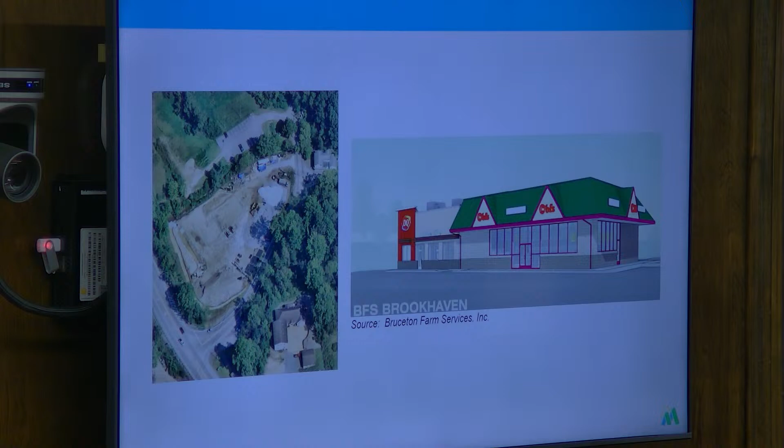One other quick question - if we could go back to page 2, or even the site plan with the districts, on the very southern part of the site it looks like there's a tiny part that might be out of city limits. Yeah, we brought that in - that was outside city limits a couple years ago, it's now all part of city limits.

Okay, I just wanted to make sure you weren't trying to get approval for the pylon sign outside city limits. Yeah, no, we had brought the piece of the property that was outside the city into the city. Oh, I remember seeing that now. I wasn't aware - so that's an old city zoning map that hasn't been updated yet, but that's all been addressed.

Any questions at this point? Thank you, and just to reiterate - you touched on this, but I want to be doubly sure - this is entirely consistent with your marketing and other things. Yeah, literally every store we do looks the same. This will actually have less signage because of the elimination of the box signs. Thank you for your flexibility in terms of the dormers with regard to the BFS signage.

We may have other questions for you, but thank you. Thanks.

So we're going to go ahead and open the public hearing for this case, VAR 24-163. Anyone wishing to speak in support of or in opposition to this case, now is your opportunity to do so. Seeing no one, close the public hearing.

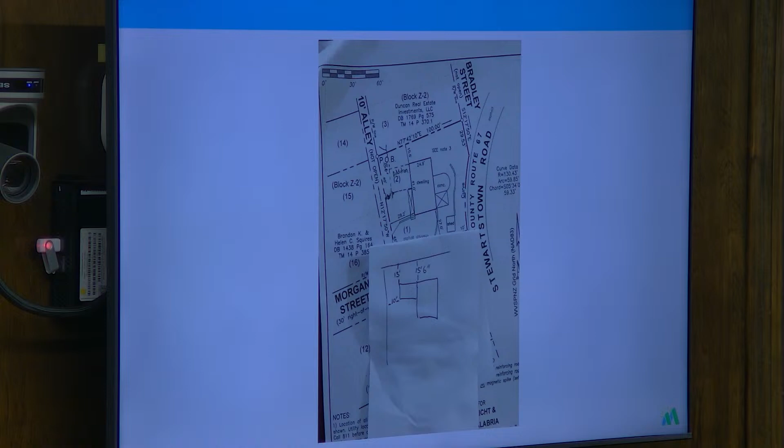That is the site plan that shows their setbacks that they're requesting. On the bottom is just the napkin drawing that indicates the rear setback, or the rear property line, as well as their side property line. You'll notice the top property line distance is referenced as 13, and that'll come up later in the variance that they're requesting. So just keep that in mind visually.

So based on the conditions listed above, the applicant requests the following: variance relief in the amount of 7 feet for the minimum rear setback of the single-family residence. That's in relation to that 13 feet. If you look at section 1335.04 for setbacks, the minimum is 20. So that's that connection there. And that concludes staff report. Thank you.

Do we have a representative for this case? Yes. Please come forward, approach the podium, state your name and address. Benjamin Leach, 845 Stewart Street. All righty. What are you proposing?

Well, due to the positioning of the home and the lot size, we're proposing to add on to our home, to expand, because obviously in the 70s they're small. We're looking to stay in the community and expand this home and improve it, as opposed to leave, which I know probably isn't relevant to code, but that's the biggest reason we're wanting an addition. There's an alleyway, a utility alleyway, between the left side and my other property owners to the left, and to the rear their homes are positioned completely differently, so I don't see where it's going to be a problem with the neighbors unless they come up and say something different. But really, we're just looking to expand upon this home and make a little bit larger livable space.

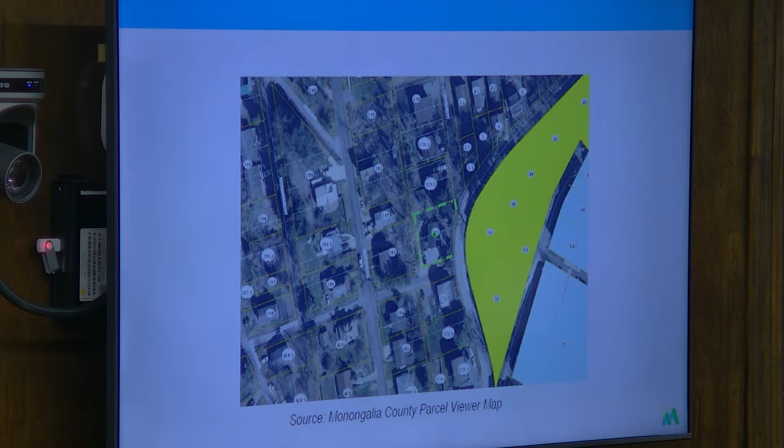Also, in the back, I discovered where the line goes through the property, my neighbor's sewer line from up above comes through that backyard at a certain point and runs down that side yard, which again would be missed by the addition, but it kind of eliminates that area from being dug up for the addition, because we'd have to deal with it—it's just a 4-inch sewer, but yeah.

And this is a big hillside here, but it's really an unusable yard because it's such a slope. So it's not a nice flat yard—it's a very unique lot.

If I'm understanding what you're proposing, on the left, would you call that the front of your house? The garage side here is the entrance from Morgan Street. So if I'm understanding this correctly, you're actually pushing the addition to line up with the back side of the house, not the front? The back side of the home.

There, that's really their utility way where they're coming through and running that new pipeline. We spoke with them, and they said we could be 10 foot of center of their pipe, but I'm proposing 10 foot from the property line back on that side, which is well within the variance for a side setback, but we're still going to stay set back to make sure we're out of their way. I talked to MUB when they were on site, before we signed off paperwork, about the construction easement and the potential addition, and they gave me a letter stating that, as long as I was 10 foot from center of the pipe, it would be fine.

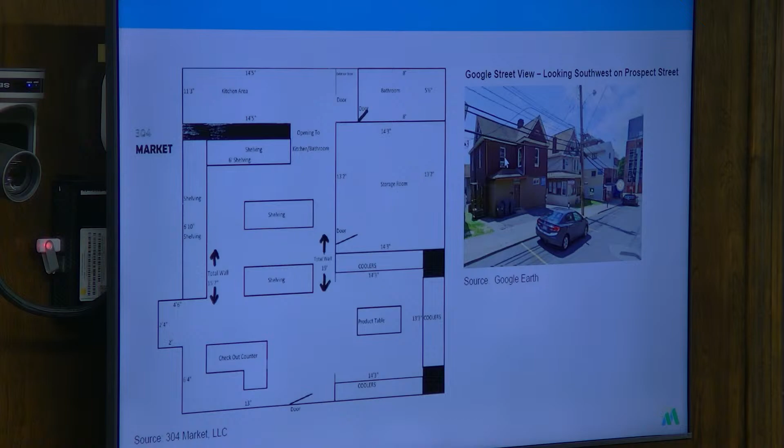Thank you very much. Do we have a representative for this case? Please state your name and your address.

Thank you very much. My name is Jeffrey Bailey, and the address is 228 Prospect Street. We purchased it a few years ago, and ironically, when we did a little history search in the neighborhood, this used to serve as a convenience store back in the 50s, 60s, and 70s, owned by a local minister. It was then converted by the person we purchased the property from into a 2-bedroom apartment downstairs, but you can see where the walls were added and where the convenience store began. My wife and I own that entire block, and we're really working to change it. One of the things we want to do is provide a service to all the WVU students living in that area, including 3 dorms, 7 fraternities, 6 sororities, plus a lot of rental homes.

We are asking for a variance in the parking requirement. We're guessing that well into the 90th percentile will be foot traffic, and that'll be our targeted audience—people walking to and from campus, people coming from the dorms. We just want to provide a small convenience store where they can come and grab snacks, drinks, toilet paper, paper towels, batteries—a needed commodity. Our son lived in this neighborhood that we owned, and he said it's one of the things they needed most, especially the kids in the dorms.

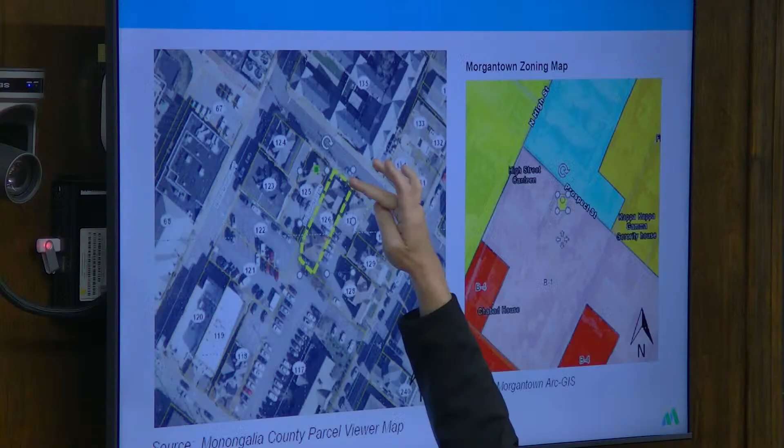We do have enough room, if need be. The door would be on this side of the building, if need be, to be right here and still be off the sidewalk in front of that building too.

So you're requesting 2 spaces? Just instead of the required 4, reducing it to 2 spaces. Because, be honest, we work there all the time, it's our property. I would guess that parking spaces would hardly ever be used, but we know we need to provide them for the patrons. That's why we're asking for the variance of reduction from 4 to 2. Our foot traffic—WVU students and professors—oh my goodness, do they walk by our place all the time.

And in this work on the bottom floor, will there be any changes in the occupancy of the units upstairs? No, it'll be the exact same. Actually, I spoke to Mr. Yeager about that yesterday. He told me it does not affect the parking available for the unit upstairs at all. I believe it's required 2 spaces, but we actually have 3 for the 3 bedrooms upstairs.

So that's an interesting thing. It requires 2, you have 3. So there's plus 1 there. Is it really possible, just for technicality's sake, to switch that 1 spot over to your shop, just on paper? Because then you only need a variance for 1.

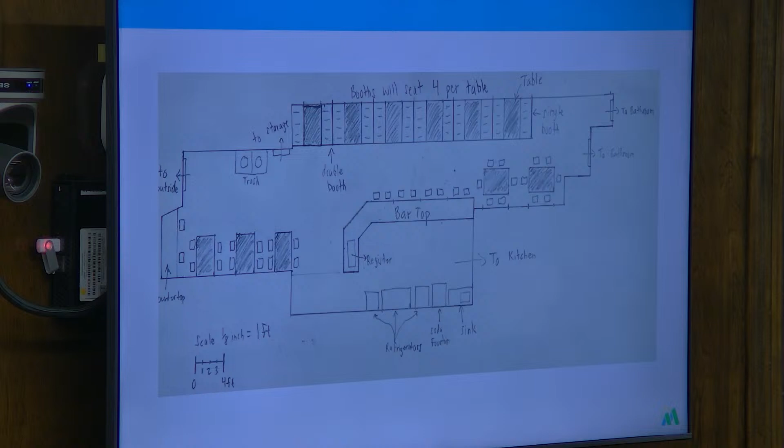That will conclude staff's report. Thank you very much. Do we have a representative for this case?

I'm Christopher Huff from 105 Treville Avenue, Morgantown. I'm here representing Monarca Taqueria. Really, it's just to be able to get the hard liquor stuff, to be able to do margaritas, micheladas, and stuff like that.

We've noticed in the past year since we opened on February 9th, 2023, that towards the end of last year and the beginning of this year, two competitors moved in, El Pollon and 1942 Tacos and Tequila.

Both of those have that hard liquor license, and we've noticed a decent drop off in our sales because of it.

Even a lot of our customers say, you have amazing food, but we would like to see the margaritas, we would like to see the tequila. So honestly, from basically customer request, we are putting forth this application.

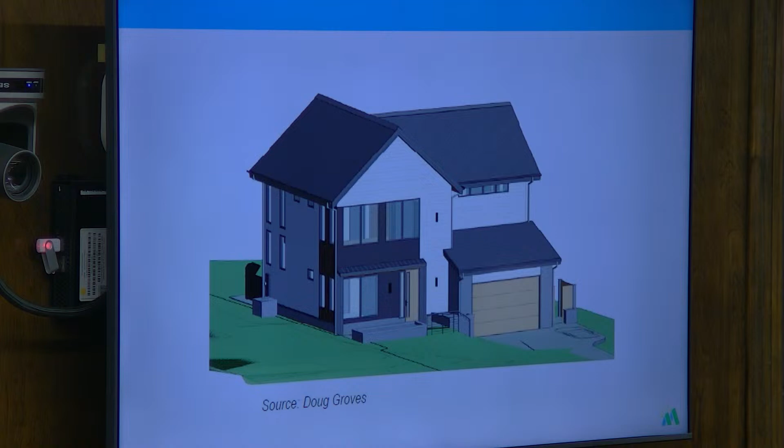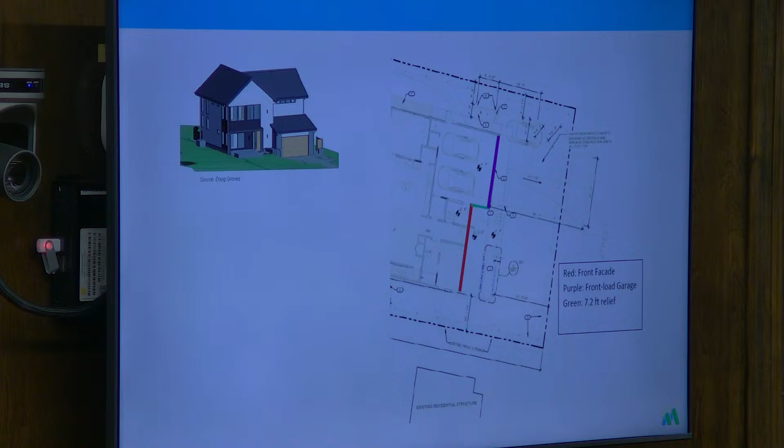So based on the conditions listed above, the applicant requests the following: variance relief in the amount of 7.2 feet for the maximum front setback of the single family residence, as well as variance relief in the form of allowing a front-load garage to extend closer to the front lot line than the primary building line of the front facade. And that concludes the staff report.

Thank you. Do we have a representative for this case?

I'm Doug Groves, the contractor. I wasn't in on... I am here on behalf of my client. She's working out of town tonight and was unable to attend. I've built a lot of homes in Morgantown. I don't think I've ever been in here getting a variance. My customers have always come in and gotten them for me, but in this particular case, I'm here for her.

Whenever Katie Granville came to me about building this house, she already had this particular plan drawn. And I was unaware of that until Mr. Thompson notified me that the garage sits out closer to the street than the front wall is for the house. That's by 7'2".

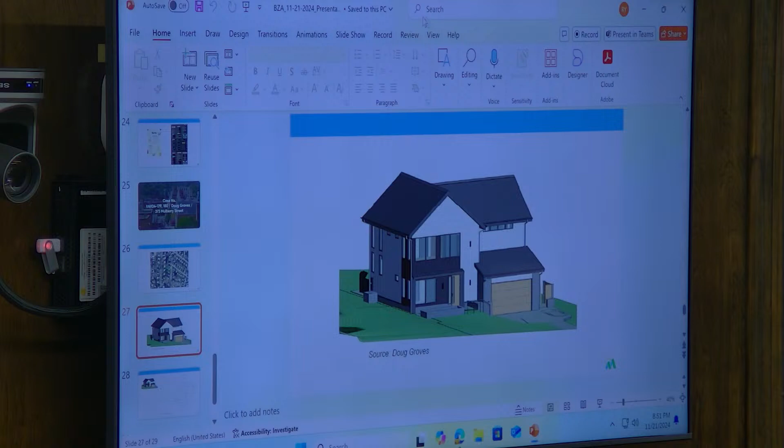Back to my question about the street. So it looks like the street does not accommodate much on-street parking at all. They look narrow, pretty narrow, they're older. That's just a supposition. So with this proposal, it tries to mitigate the on-street parking issue, which I think, and they mentioned that in the finding of fact, and I think that's something that is to be commended, and that's a precedent in the rest of the neighborhood too, that there is ample parking for cars off-street.

Any other questions? No, okay. We may have more questions for you. Thank you very much. Okay, so let's go, there being no further question, discussion.

I'm going to open the public hearing. Anyone wishing to speak in support of or in opposition to these cases, VAR 24-179-180, now's your chance to do so. Seeing no one, close the public hearing.

Please see the attached application to review the findings of fact listed, as staff had no comments or modifications. Staff have no objections to the applicant's request for variance relief. If the Board of Zoning Appeals grants the applicant variance relief from Section 1333.04A, Part 2, as well as Section 1333.07B, Part 5 of the city's Planning and Zoning Code, the new principal structure shall be subject to the following conditions listed in your packet.